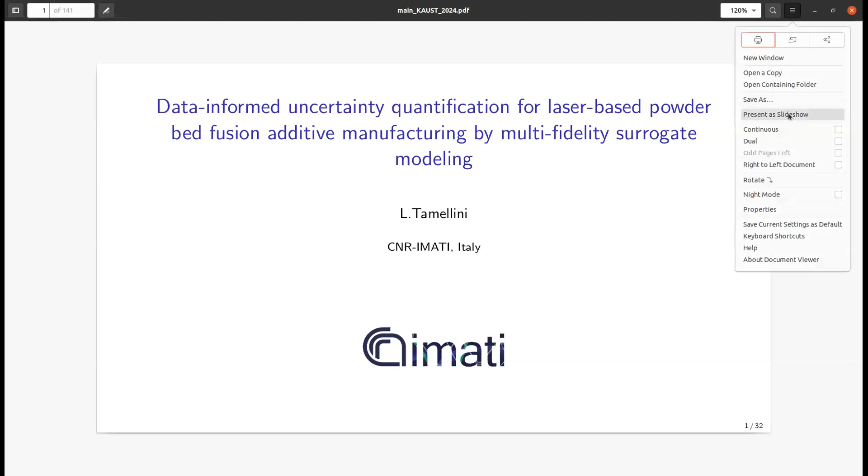Thanks, Joachim, for setting up the stage. Thanks, everyone, for listening. It's too bad I cannot be there, hopefully next year. But in the meantime, can you hear me well and can you see my screen? Yes. Okay. How much time do I have? 45 minutes or so? You have 1 hour, but that includes questions. Yes, including questions. So, okay, great.

So the title of my talk is, as you see on the screen, data-informed UQ for laser-based powder bed fusion additive manufacturing by multi-fidelity surrogate modeling. There's a lot to unpack here, so I will see how well I can do.

The outline of the talk: first I will give you a brief introduction to the so-called multi-index stochastic collocation. I think most of you are very familiar with this, but just in case someone in the audience is not experienced with it, it's a special multi-fidelity method for parametric PDEs. It extends the sparse grid collocation method, and what you get at the end of the day is a surrogate modeling approach. So you get a response surface of the quantity of interest of your problem that you can use for quantification purposes. Then I will spend most of my time talking about the additive manufacturing problem that we try to tackle with the multi-index stochastic collocation method.

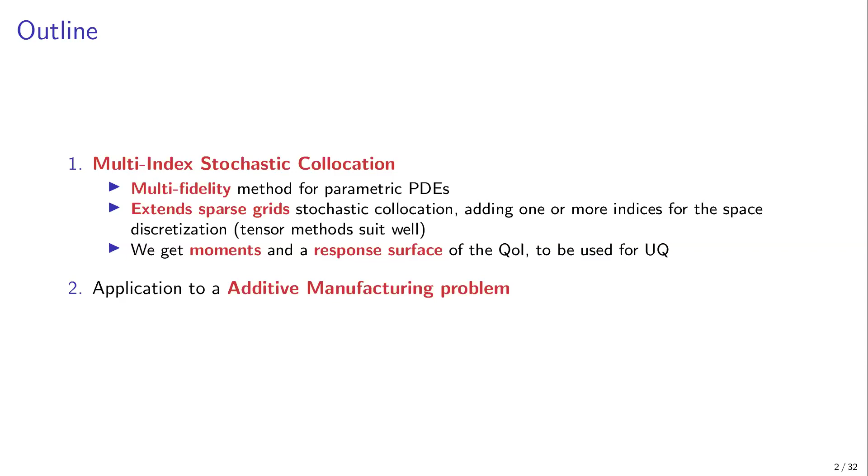So I have to acknowledge a bunch of people. As for the multi-index stochastic collocation, several people have worked on that during the years: Raul, Fabio, Abdul Latif, and Joachim, all in the room as far as I know, and Chiara Piazzola also - she was a postdoc with me in Pavia, and now she is at Munich TUM. And regarding the application today at the additive manufacturing problem, the group of civil engineering at University of Pavia: Ferdinando Auricchio, Massimo Carraturo, Michaela Chiappetta, and Alessandro Reali, and again Chiara Piazzola.

So the first part is where I talk to you about multi-index stochastic collocation. If you are already familiar with this, just feel free to check your email for 5 minutes - I'll tell you when I'm done. For those of you who don't know, this is a brief introduction to the method. Throughout the talk, I'm interested in computing a quantity of interest F out of a PDE.

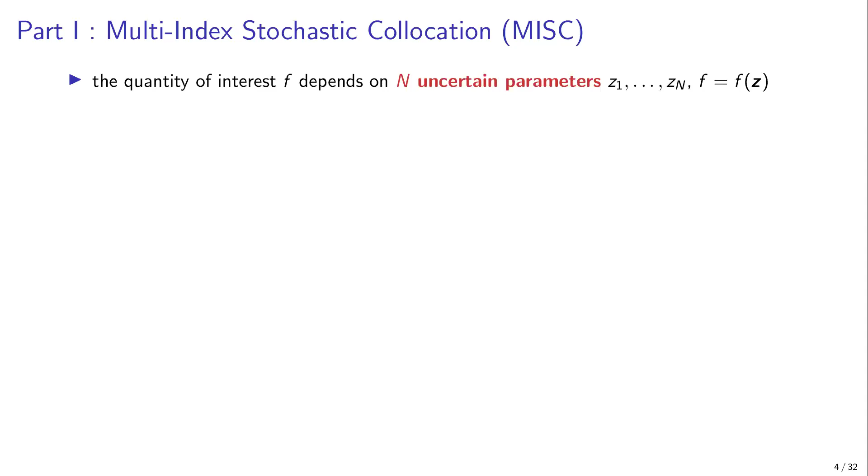This quantity of interest F depends on n uncertain parameters. The PDE that we are working with depends on these n uncertain parameters, which I call Z1 to Zn, and F is the output of the PDE solver. For instance, just to fix ideas, in the final application, the quantity of interest will be the warpage of the component that I'm printing, as well as the strains - quantities of interest deduced from the solution of the PDE.

The PDE solver, we assume, depends on R hyperparameters. By hyperparameters, I mean mesh sizes, time steps, tolerances for solvers - these sort of things. So parameters are physical quantities, hyperparameters are my knobs to decide what solver I'm actually using. And then I collect them in a vector alpha that has R components.

It's a multi-index that I use to control the PDE hyperparameters. So for instance, the mesh size could be 2 to the power minus alpha, or the time step could be 2 to the minus alpha, or maybe I want to play with both the mesh size and time step, and then I have two components, and H will be 2 to the power minus alpha 1, and delta T will be 2 to the power minus alpha 2.

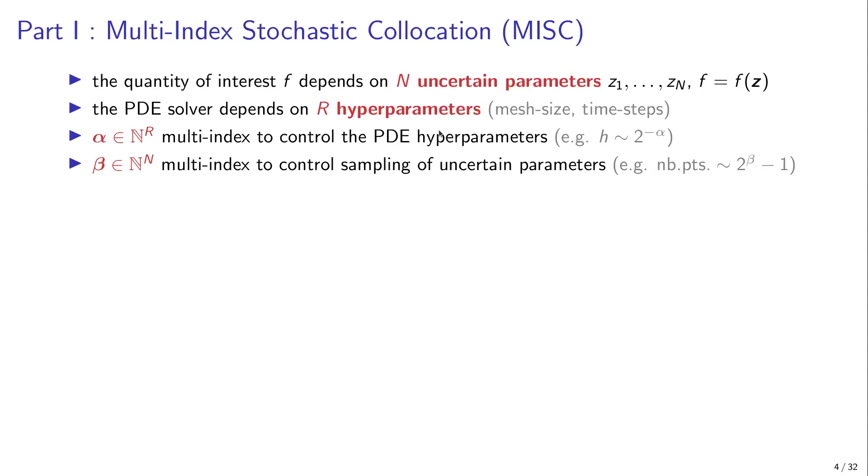Same thing for beta. Beta is a multi-index, it has n components, and each component of beta controls how much I sample the parameter space along each parameter. So for instance, I could decide that I put 2 to the power beta-i minus 1 points along each direction of the parametric space. And then f sub alpha beta is the approximation of the quantity of interest that I'm interested in, given a PDE solver with hyperparameters controlled by alpha, and sampling scheme controlled by beta.

So for instance, here, if I want to solve a linear elasticity problem over this banana shape, and imagine that the elastic equation depends on two uncertain parameters, this is a picturesque representation of the fact that I want to use a multi-index 2, 4, 2 to decide the three discretizations of the mesh. So you see here the mesh is 4 by 16 by 4, so multi-index 2, 4, 2, and I'm using 3 times 9 points in the collocation space - multi-index 2 gives 3 points, and multi-index 4 gives me 9 points.

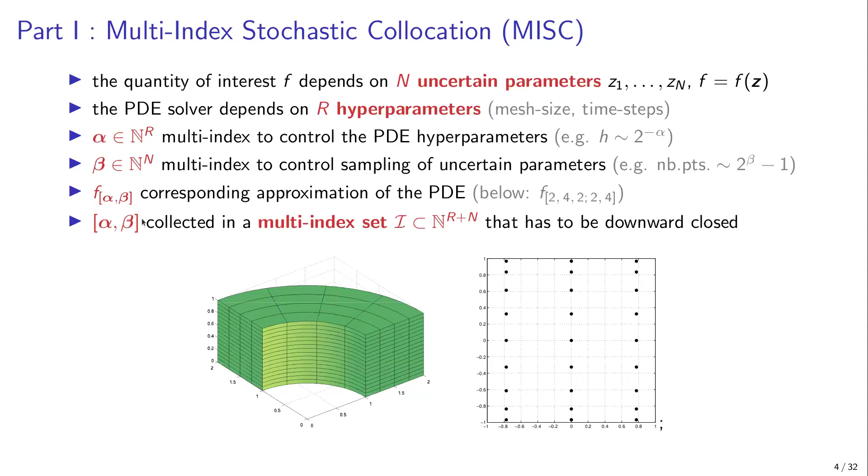I want to juggle not just one discretization f sub alpha beta. I want to juggle multiple approximations. So I need to collect all the approximations indexed by alpha beta in a multi-index set. And as I promised, I want to juggle many approximations.

What I mean more specifically is the MISC formula gives you this approximation. So the approximation of your quantity of interest, f of z, is the MISC approximation, a linear combination of multiple approximations, f sub alpha beta, each multiplied by a certain coefficient c, which depends on alpha beta. So this is what I mean by juggling multiple combinations, multiple approximations.

This has advantages if you do things properly, let's say. So here's just a pictorial representation of MISC.

Imagine that you have just one hyperparameter, so r equal 1. Imagine that you have one uncertain parameter, so n equal 1. And imagine that you have two levels of mesh. So on the horizontal axis, I have alpha equal 1, alpha equal 2. On the vertical axis, imagine that I can either compute one point in parameter space, or two points in parameter space, so 1 and 2.

I have these 4 possible f sub alpha beta, C, Q, F, and P, and I'm looking for a certain linear combination of P, C, Q, and F. In particular, F is the highest fidelity, where I compute a lot of samples, over a fine mesh. This is out of reach, so the MISC approximation takes into account the other 3 possible approximations, P, C, and Q.

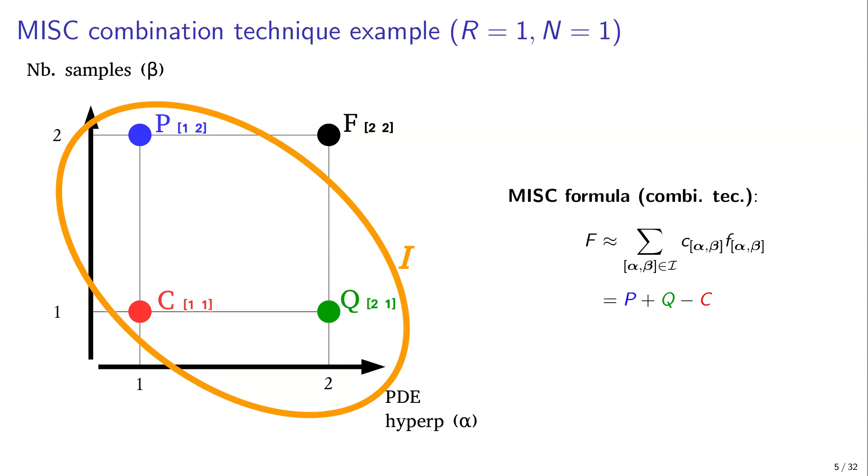So I want to choose the best set of approximations to combine, and there's an algorithm to do that. It's a very standard algorithm, inspired by the usual Gerstner-Griebel a posteriori algorithm for sparse grids. It essentially goes around in this space of all possible approximations, computes a profit for each of them, and iteratively selects the most profitable one, and then goes on and on.

So it's very easy in a way. The devil's in the details, but overall the idea is quite simple. In practice, what this method does is reconstruct a full approximation as a linear combination of many coarser solutions. So you see here, I'm reconstructing the true solution as a linear combination of P, Q, and C.

It extends the sparse grids approach to a multi-fidelity approach. Sparse grid stochastic collocation would be single fidelity. Instead, here we're playing with multiple fidelities with the hyperparameter alpha. So it's a multi-fidelity method.

And if you do things carefully, it balances the solver error, the PDE solver, and the parametric error. We do have convergence rates, and these convergence rates resemble those of sparse grids. So if you know those results, you know what I'm talking about. If you don't know those results, it's enough for you today to know that there are convergence rates.

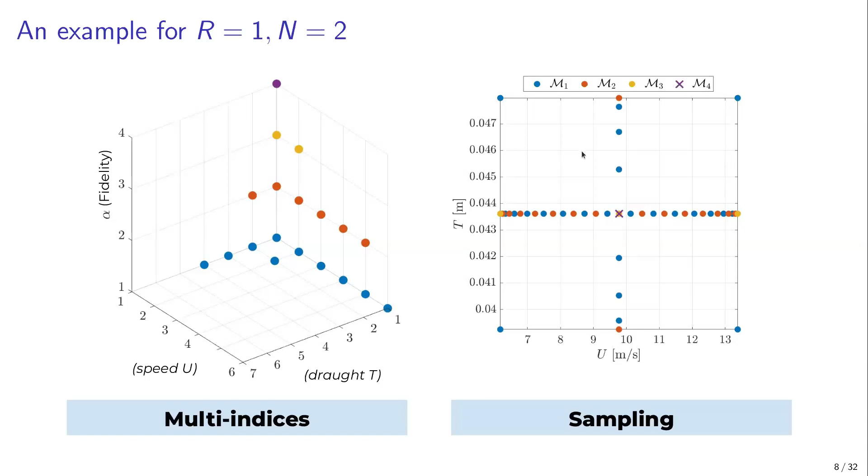Then I think I will just skip this. This is a standard test case. I don't want to talk about this.

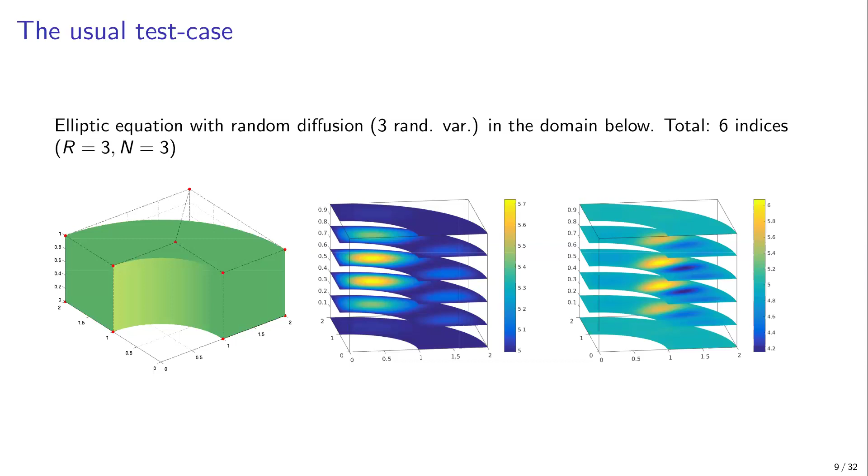And this is essentially when the response of the PDE, so the quantity of interest, depends smoothly on the uncertain parameters. And why is that? Because the idea is that you explore most of the variability of the output with a lot of queries to a coarse solver, and then you correct with only a handful of calls to the higher fidelities.

So here, this cartoon is just to show you that in the previous convergence line I was showing, eventually for the finest fidelity, for the finest tolerance I'm requesting, I'm evaluating only 100 times the largest mesh, versus a few thousand evaluations of the coarse mesh. So this is why we gain in complexity, let's say.

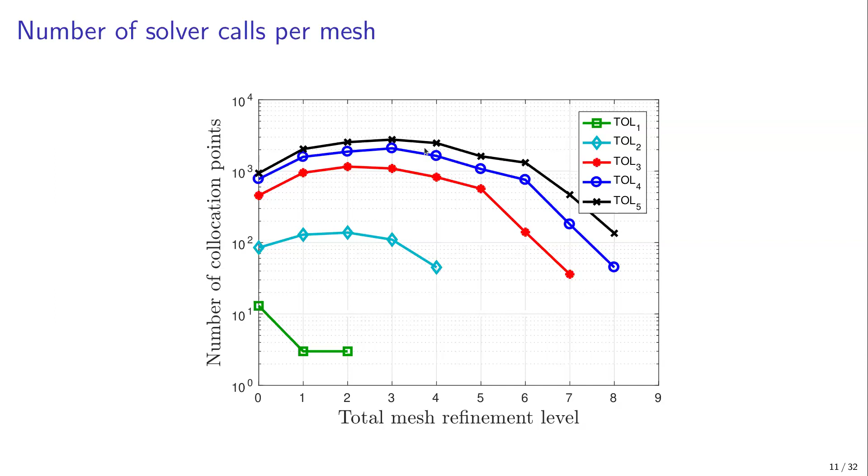So now it's time for those who disconnected because they know MISC to get back to me, because now I'm going to talk about the application, the additive manufacturing problem. So let's try and make this informative also on the application. I want to give you some flavor of the actual problem.

This is a 3D printing in practice problem. Specifically, I'm talking about 3D printing of metals. 3D printing of metals is usually done by this technology called laser-based powder bed fusion. In 3D printers, there's a layer of powder, a laser goes around and melts the metal. Everything cools down. Another layer of powder is laid, another time the laser goes around and melts the powder, and in this way, an object is built layer by layer.

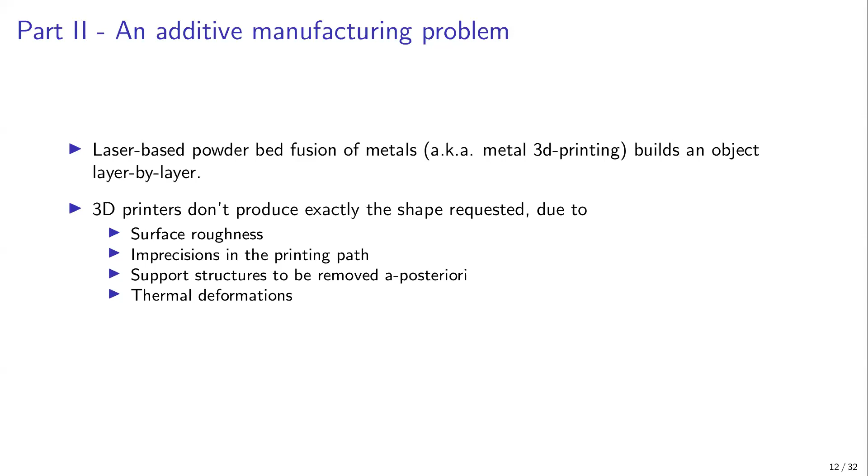Of course, there will be need for support structures, small pedestals or columns that you want there just while building, while printing, and then you want to remove them. But when you snap away these support structures, you might be left with an imperfection in the surface. There are thermal deformations because the metal is constantly heated up and cooled down every time the laser goes by. There are a lot of thermal deformations, and there are residual stresses.

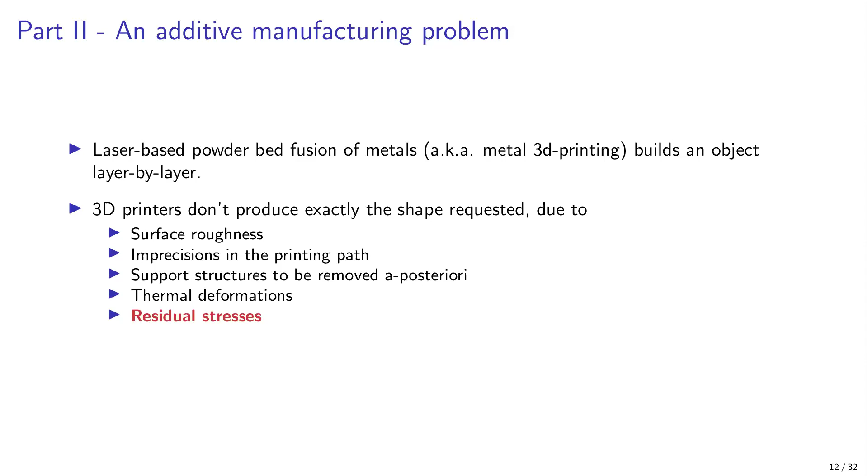And we focus - the problem we are facing in this talk - is what to do with residual stresses. Let me be clear, what do I mean by residual stresses? It means that, let's say you want to print this object here, this beam or this comb if you want. Can you see my mouse, by the way? If I move the mouse? Maybe not.

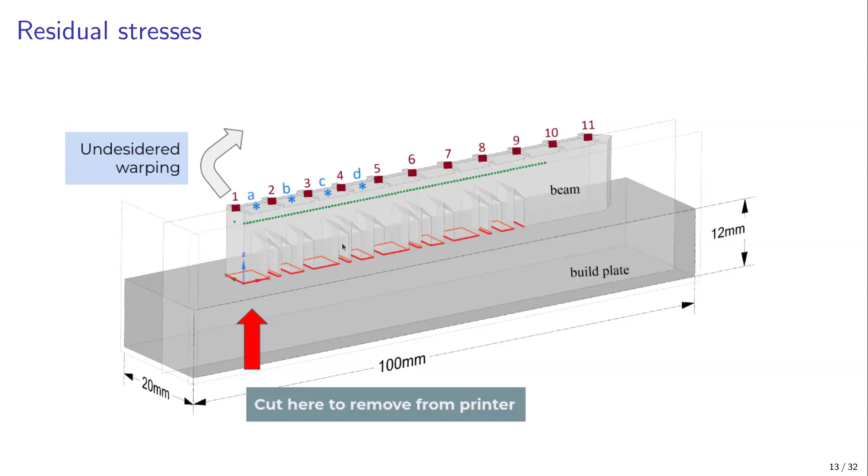But anyway, yes, okay. So if you want to print the comb, what you do in practice is there's a build plate, a larger chunk of metal, and then you print the beam on top of this. Then you want to remove the comb, because that's your final object, the thing that you care about - you don't care about the build plate. The moment you cut the red areas to remove the comb from the build plate, there will be an undesired warping. It means this: you cut it open, internal residual stresses are released, and the deformation is applied. It's pretty much like when you crack open a watermelon.

Once you crack open the watermelon, you will never be able to put it back together, because the moment you crack it open, internal stresses are released, and these deformations happen. And of course, we don't want the deformed part, we want the original one.

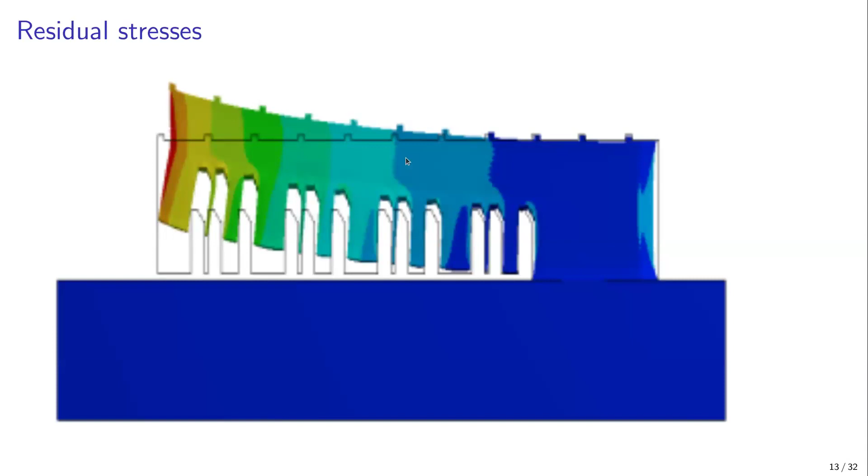So we want to monitor the residual stresses and optimize the printing process such that the residual stresses are as little as possible. There is thermal treatment, so if you bake the objects before cutting them open, it improves the release of these stresses.

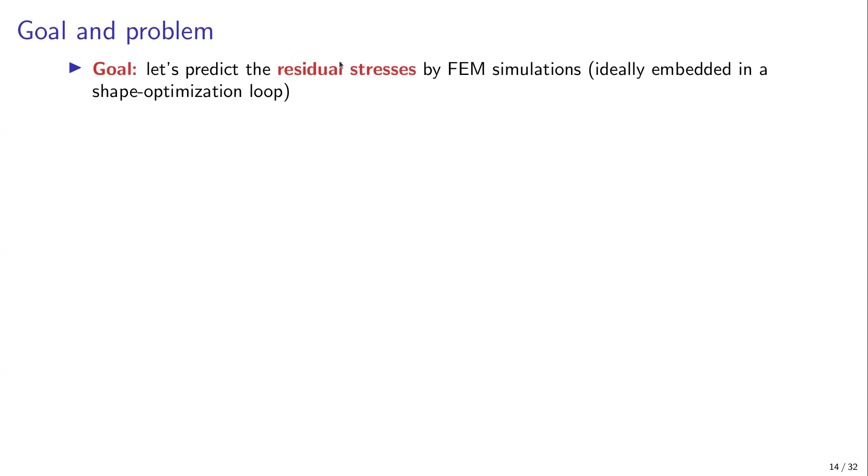But still, ideally, you want to have a FEM solver, a FEM simulator that simulates the printing process and predicts the residual stresses, so you can optimize the process to reduce them. Problem is, these simulations are crazy expensive. It's a matter of days on supercomputers.

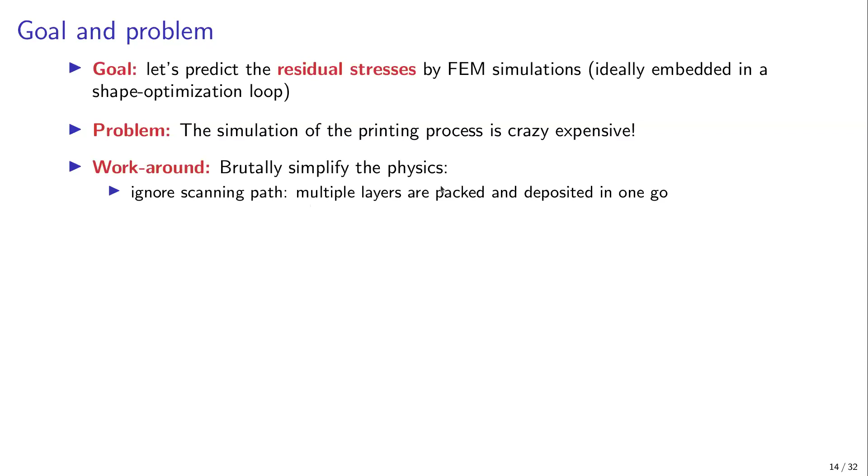So what we do is brutally simplify the physics. We go ballistic. To begin with, we ignore the scanning path. So instead of having a laser that goes around, to simulate the printing of a whole component, you have to assume that multiple layers are packed and deposited in one go, without simulating the scanning path.

Then, instead of solving a time-dependent, fully plasto-thermal PDE, what you do is solve a time-dependent, non-linear thermal equation only on the sequence of geometries you have. Then you store the thermal field history, and solve a quasi-static mechanical problem to evaluate the thermal strains. So a sequence of mechanical problems, but you forget about the temporal evolution.

And now the problem is we're replacing a couple of viscoelastoplastic thermal PDEs with a thermal PDE and a mechanical PDE. So the physics is totally made up.

So what kind of parameters do we use in this thermal plus linear mechanical model? We don't know. Those phenomena don't exist in reality. So we need to cook up the parameters of the non-linear thermal equation and of the quasi-static mechanical problem to have this super simplified and non-realistic physics match the real process.

And what we do is an inverse Bayesian analysis to find the parameters of this cooked-up physics that match the experimental results. We do this using surrogates, either sparse-grids or MISC.

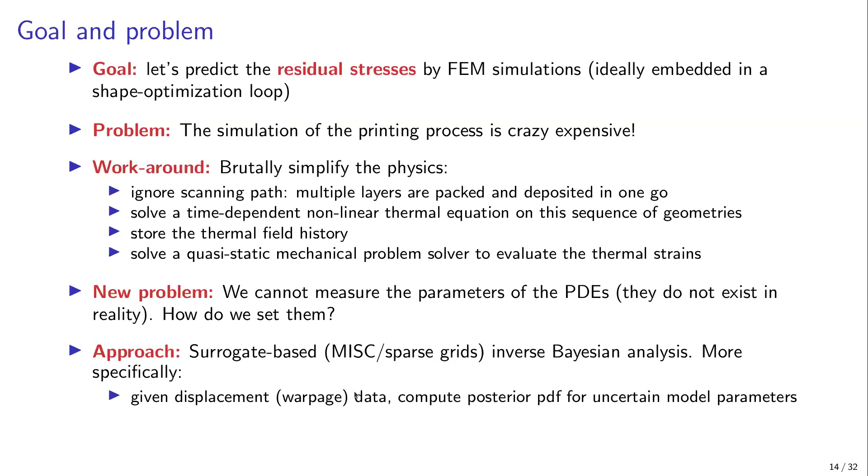In particular, we have displacement data, we have warpage data. So someone prints the comb, measures the displacements, and with this data we compute the posterior PDF of the uncertain parameters, then propagate the posterior PDF through the model to compute the PDF of the residual stresses. Once we have the residual stresses, we are done.

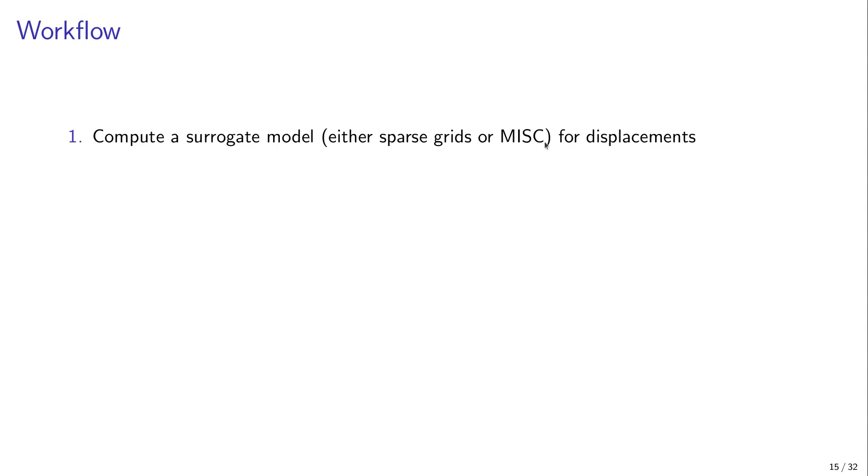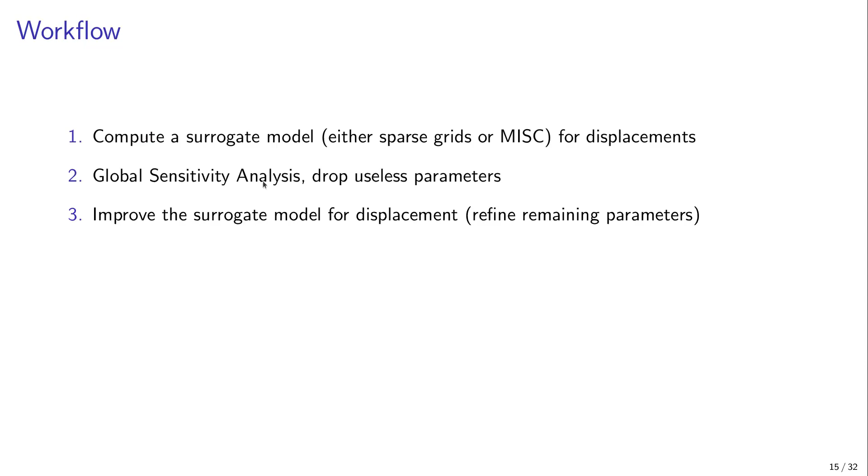So what we do in this talk is compute a surrogate model, either single fidelity or multi-fidelity, for the displacements of the comb being printed. We do a preliminary round of global sensitivity analysis to drop the useless parameters, then refine our surrogate model based on this analysis. We do inverse Bayesian analysis to compute the posterior PDF of the uncertain parameters.

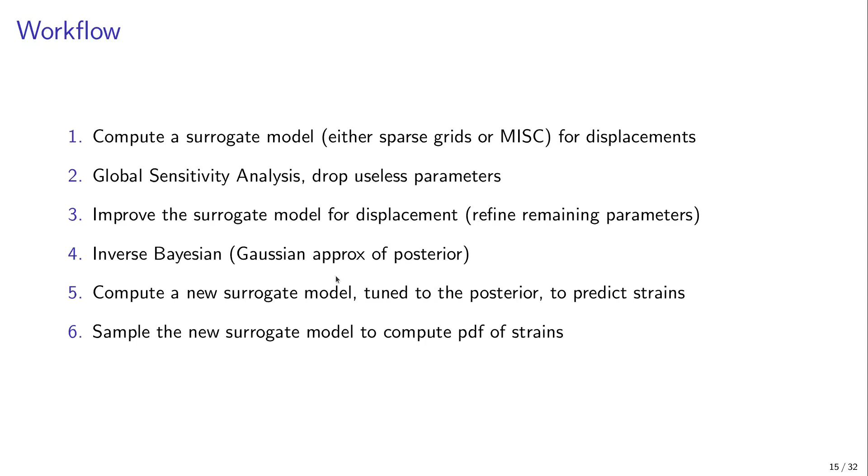And then we compute a new surrogate model, this time for the strains, not for the displacements, tuned to the posterior to predict the strains. And then we query the surrogate model to compute the PDF of the strains.

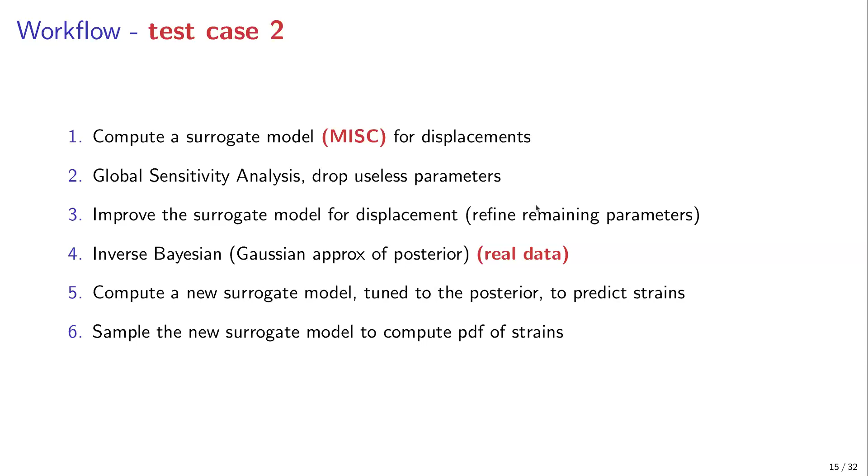I will walk you through two test cases. The first test case is with synthetic data and uses a single fidelity approach. This is already enough to walk you through most of the technical difficulties. Once I'm done with that, hopefully I will make it also to the second test case, where we use a multi-fidelity surrogate model with real data provided by NIST, the National Institute of Standards and Technology from the US.

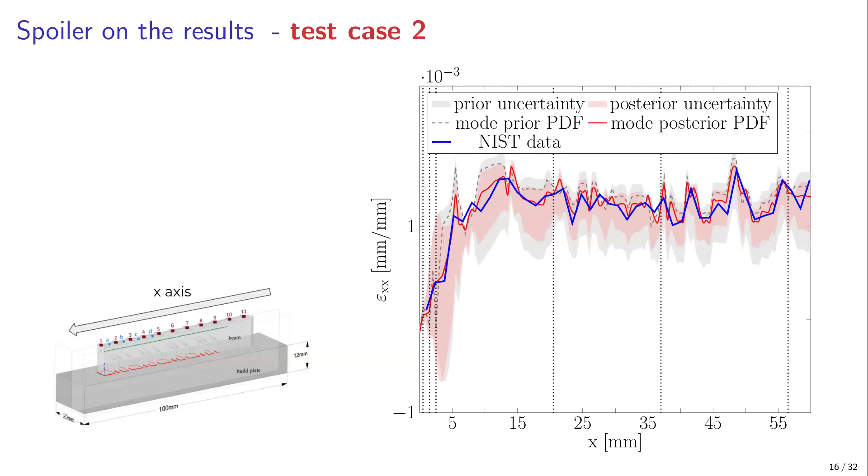So in short, we are using either a single fidelity or a multi-fidelity surrogate for a complicated problem. We are able to predict everything. It works.

But there are some technical difficulties. The first difficulty that was mentioned is computational time. One simulation takes 4 hours on the lowest fidelity mesh and 6 days on the high fidelity mesh. And it's not 6 days on my laptop, it's 6 days on servers provided to us by ANSYS. We are using ANSYS to simulate the 3D printing process. One simulation takes 6 days on those servers. So it's really something, let's say.

Then we didn't go fully Bayesian, so we didn't go Markov chain Monte Carlo. We were happy enough with a Gaussian approximation of the posterior. There's something that needs to be taken care of there. I'll show you later on.

And then the final technical difficulty that maybe some of you caught already is that I'm using 2 surrogate models. One is tuned to the prior, one is tuned to the posterior. Can we do something better than that? I have ideas, but I'm not going to show you any results on this.

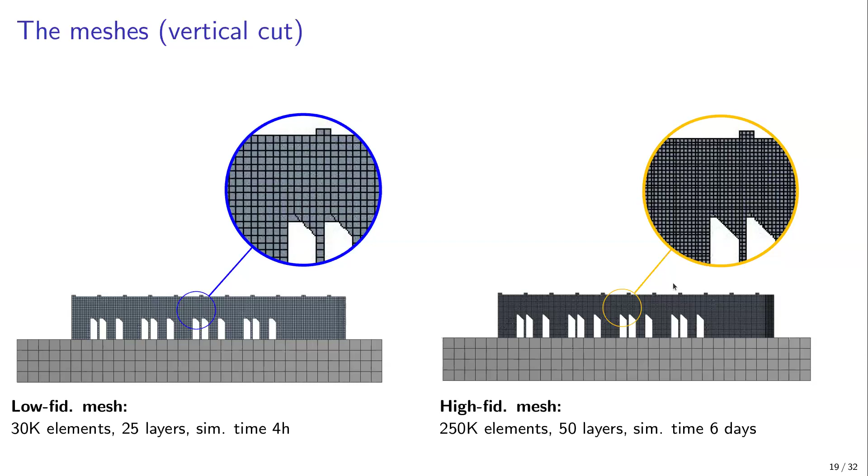As I said, each layer is deposited in one go. We don't simulate the scanning path. It's laid at the activation temperature T. Then you wait for it to be cooled, and then you add a new layer. What we don't know is the activation temperature, really, because that's a non-existing quantity in a way.

And then we don't simulate the presence of the powder in the printing room. So what we simulate is just the heat dispersion, the heat exchange with either the powder or the gas that surrounds the part. The part is either drowning in powder or exchanging heat with the air. Where it's not air, it's an inert gas like argon, or I don't remember. And we don't know these two exchange parameters. They are non-existing, so we don't know. We have to tune them.

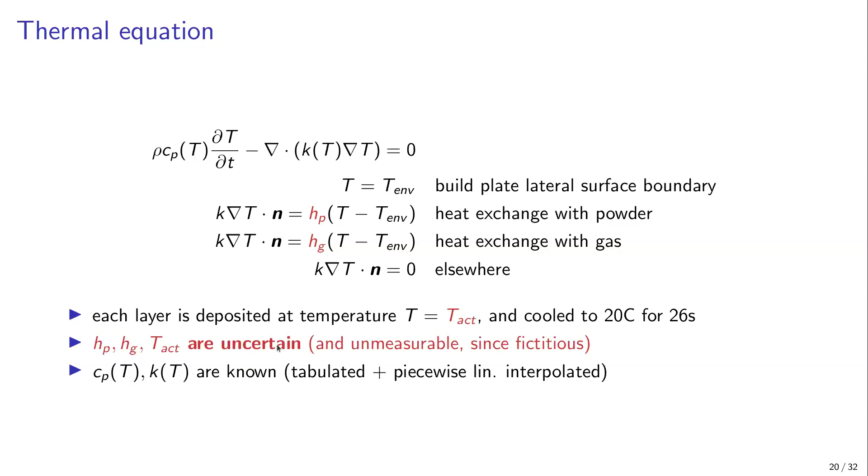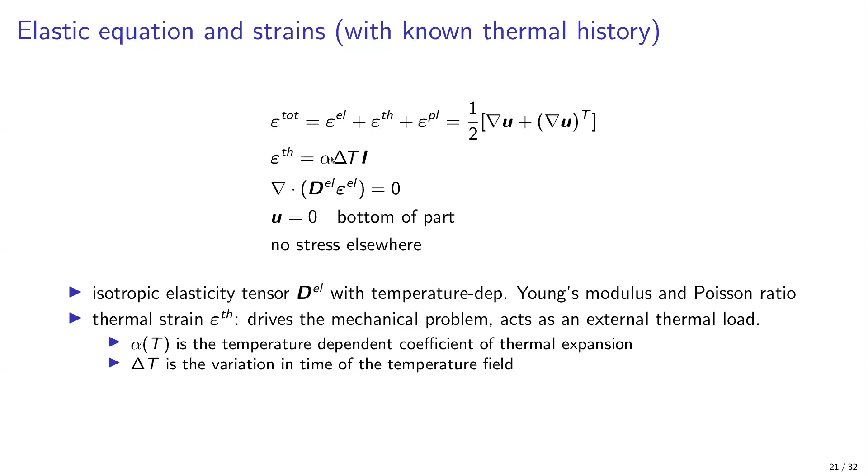The other two parameters, CP and K, we know them. They are tabulated and linearly interpolated. The elastic equation for computation of the strains is this. There's an elastic part—the Young modulus and the Poisson ratio are temperature dependent. There's a thermal part—the alpha here is also temperature dependent. And then there's a plastic strain rate computed with the Prandtl-Reuss flow rule, which is also temperature dependent. So the elastic equation is temperature dependent. And this is all I want to say about the elastic equation.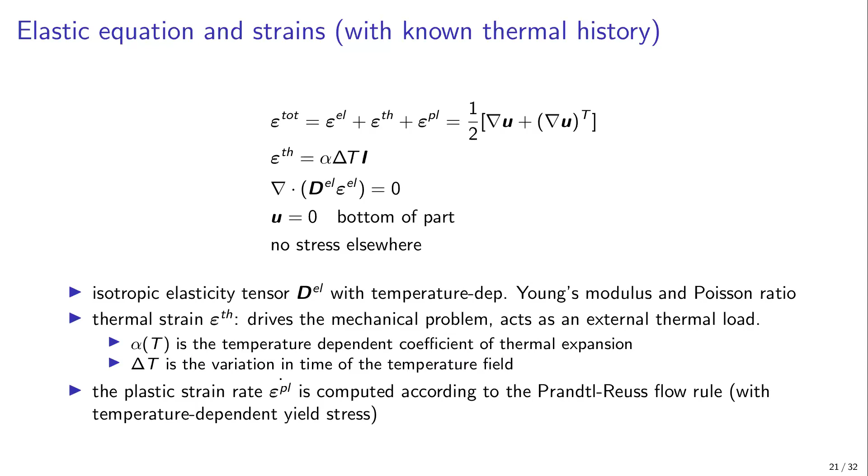Now, let me go a bit more into the UQ side. As I said, we assume that we don't know three things: the activation temperature and the two heat exchange coefficients. For the activation temperature, people in literature use numbers in this range, more or less.

The gas convection coefficient is also widely unknown. We thought it would be nicer or more convenient to assume uncertainty on the logarithm base 10 of the convection coefficient. So this thing can go between 10 to the minus 5 and 1, essentially. So the logarithm goes between minus 5 and 0. These three uncertain parameters, we take them as uniform. We don't know anything, essentially, more or less.

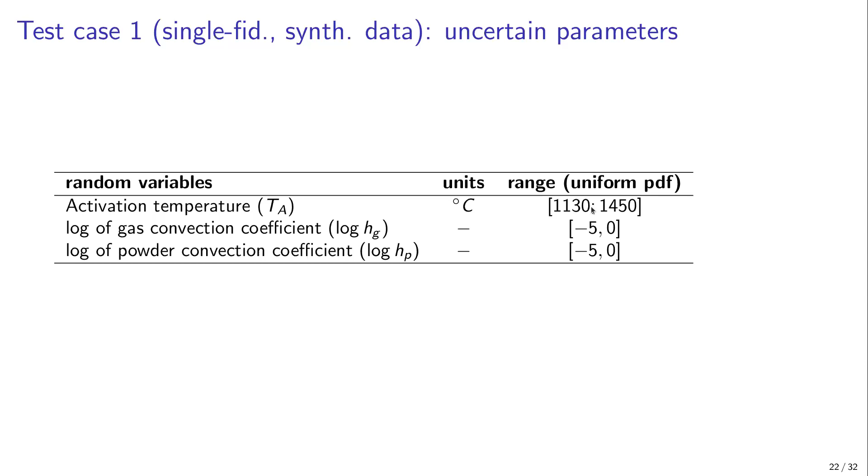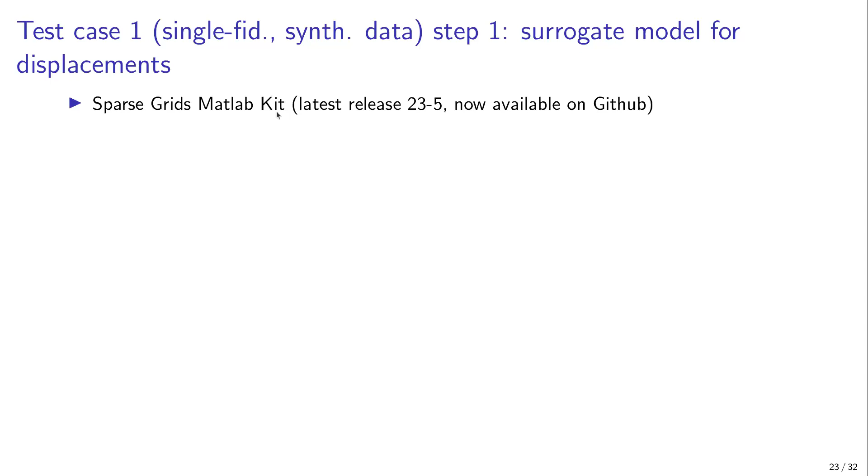First thing first, I promised you a surrogate model for displacements to do the global sensitivity analysis. The tool that we use is the Sparse Grids MATLAB kit. We build a very coarse isotropic sparse grid with 27 points. This is already something, given that one simulation takes 4 days.

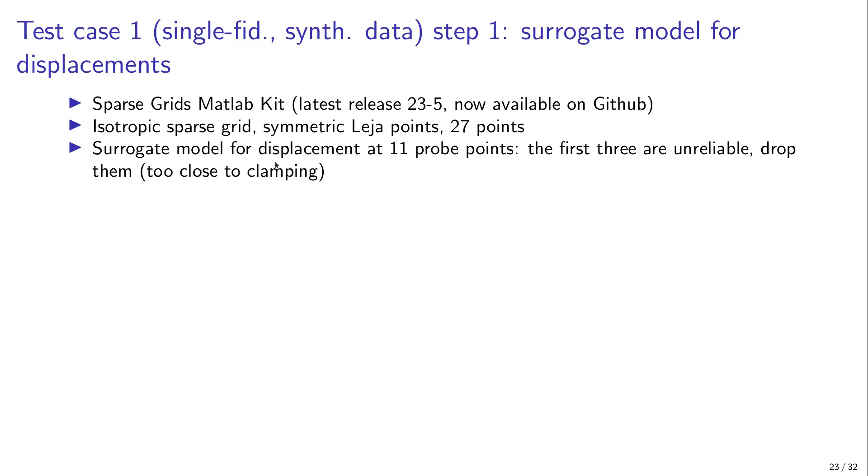And then we do a surrogate model for the displacement at these 11 probe points, 1 through 11. We actually immediately realized that these 3, 11, 10, and 9 were too close to the clamping part, so nothing interesting happens here. We just drop them.

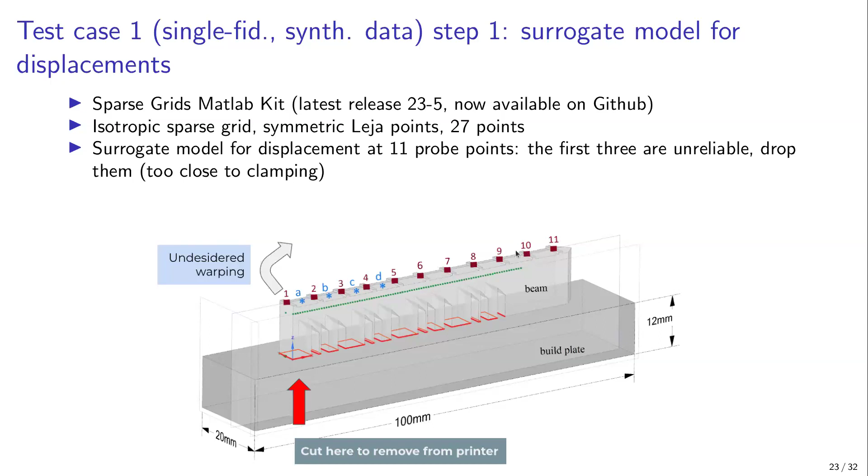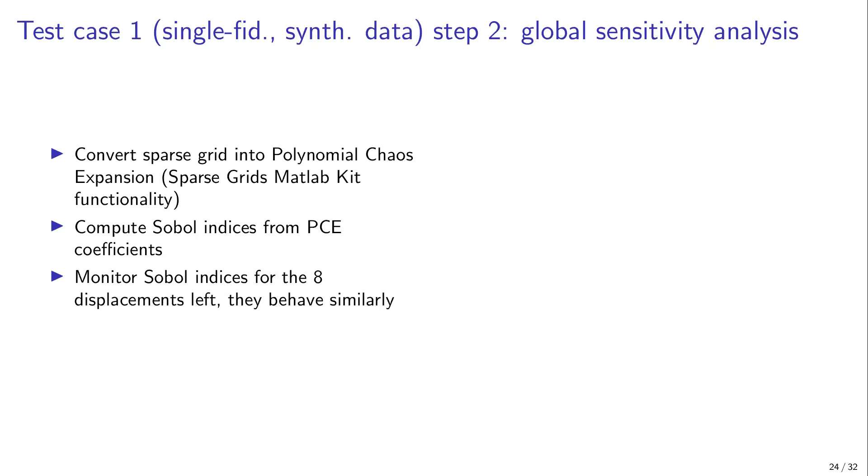Once we have the surrogate model, we convert it into polynomial chaos and compute the Sobol indices for global sensitivity analysis purposes. These are the principal Sobol indices. Forget about these three, they are irrelevant, they are unreliable. The other 8 probing points, TA and the logarithm of the powder, are the only things that matter. So we fixed the third parameter, and from now on we will just consider two uncertain parameters.

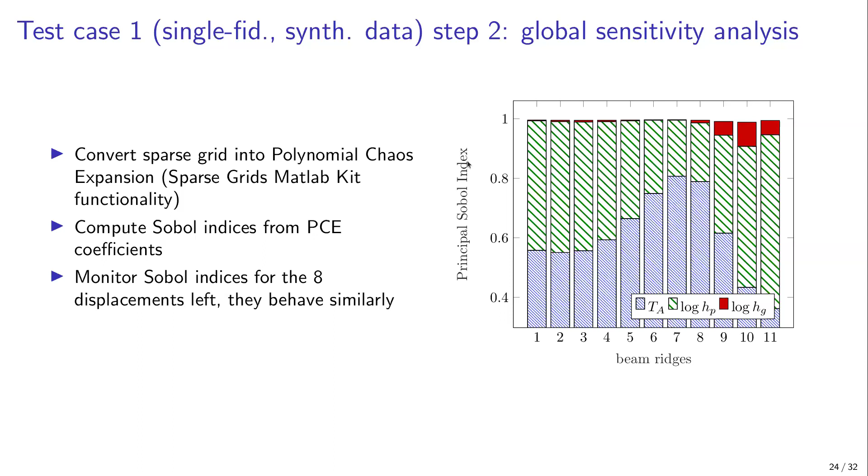At this point we fixed the third parameter to a convenience value, and we refine the surrogate model a bit. This time we have only two parameters, so we can push it a bit further with 25 simulations using symmetric Leja points. Again, we do a surrogate model for the displacements of 9 probing points, labeled 1 to 5 in the plot, and A, B, C, D, because this is where we have the data by NIST. So we don't care about 6, 7, 8, and 9. We can forget about them. We only care about 1 to 5 and A to D.

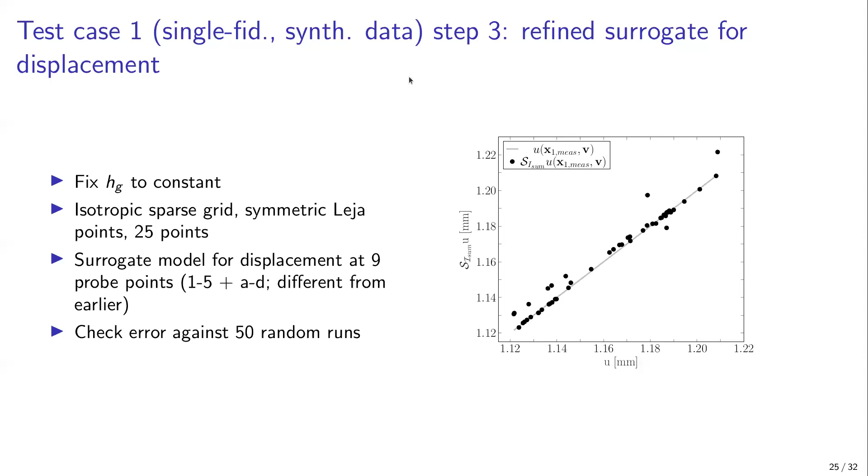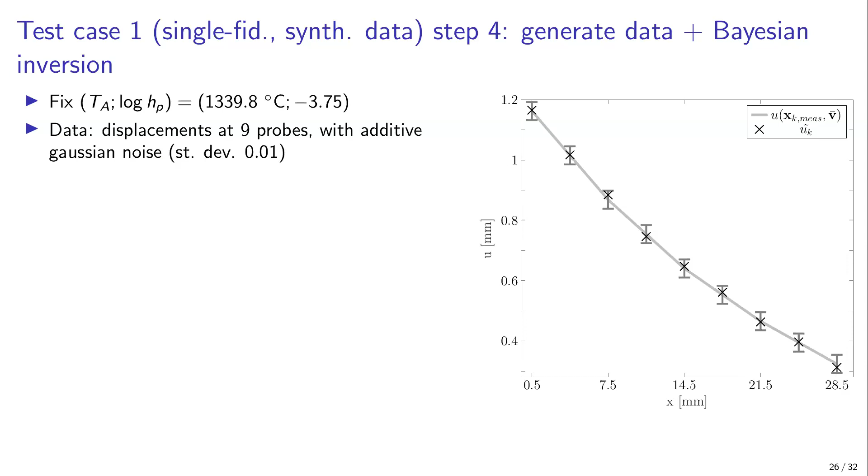Now here it's something perhaps non-standard. What we do, of course, is write down the negative log likelihood. Everything is fairly standard. Then I want to minimize the negative log likelihood to get the maximum a posteriori, and I do this by Nelder-Mead, a derivative-free optimizer. I run it 20 times, starting from different initial conditions.

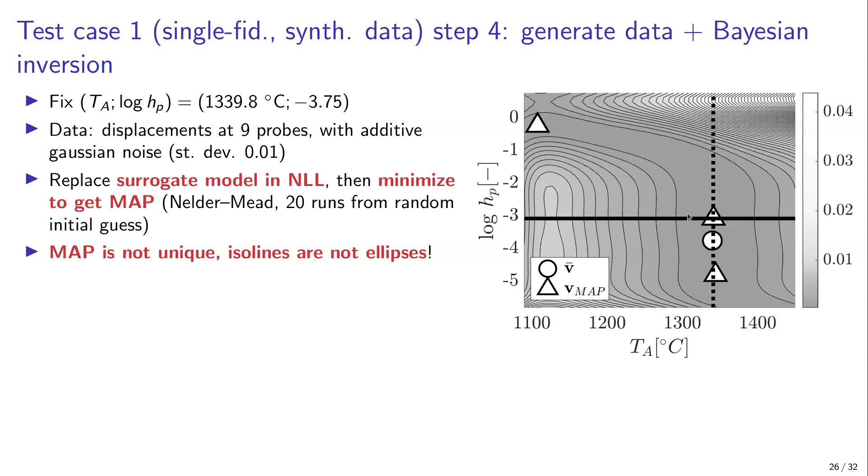So what we claim, whether this is appropriate or not is up to discussion, I'm happy to talk about this. We made our life easier and claimed that the posterior of TA is Gaussian, and the posterior of log HP is uniform, but on a smaller interval. The Gaussianity is standard. The posterior of log HP is uniform on a smaller interval that we're taking, essentially eyeballing the interval by looking at the one-dimensional cut of the NLL - so more or less between -5 and -1.5, close enough. Is this ideal or mathematically rigorous? No, probably not, but it worked, and it doesn't seem completely crazy.

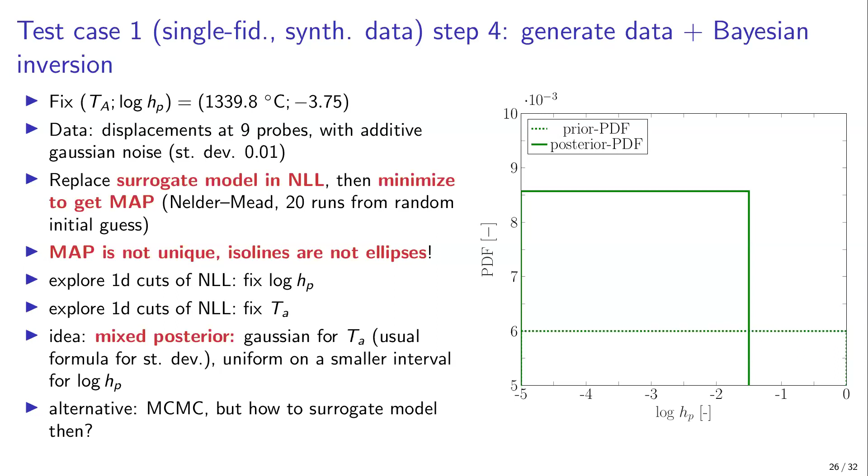Now the point is that I have a posterior with well-defined PDFs. So I can generate another surrogate model, this time for the strains, not for the displacements, and this time with one parameter being uniform and the other one being Gaussian.

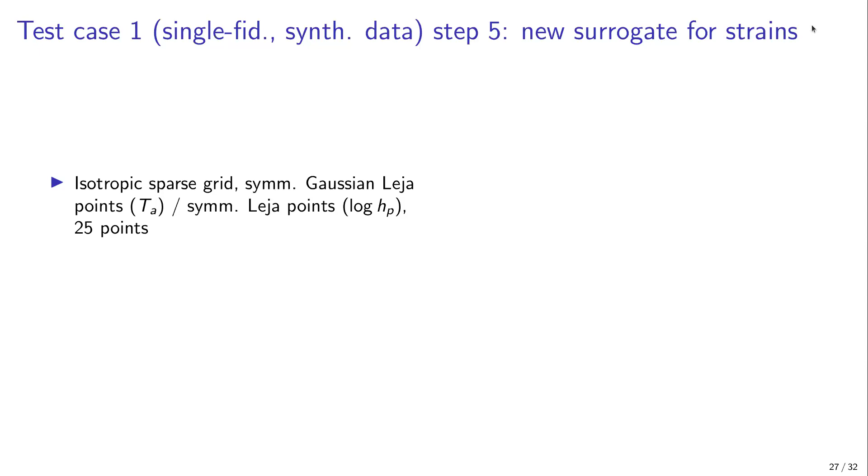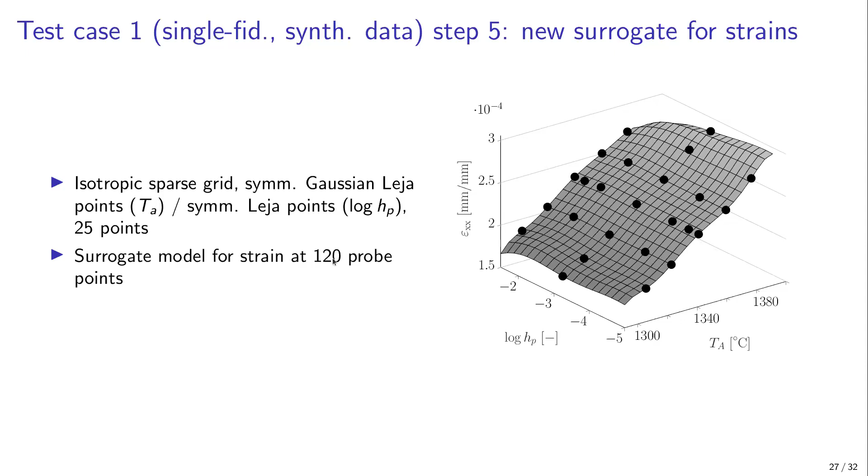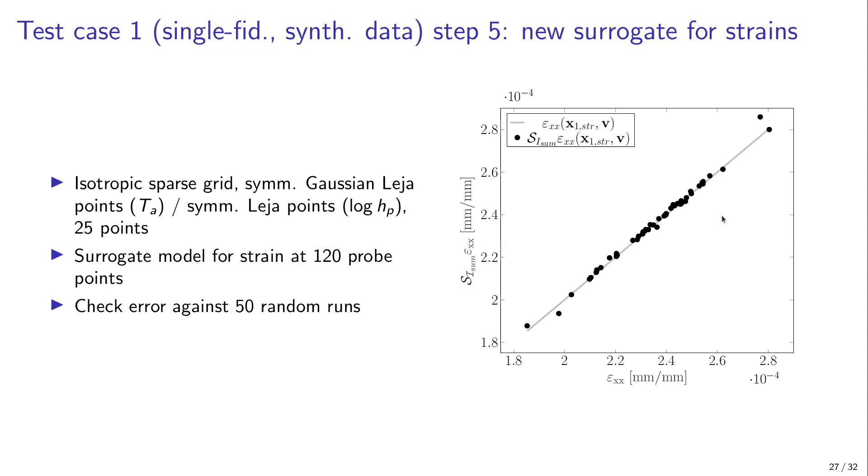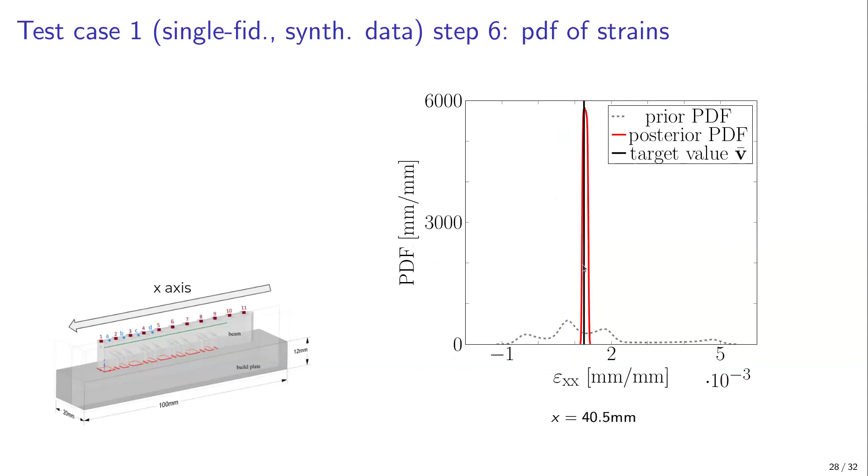Now this is the support of the prior and posterior based quantity of interest. I'm going to show you next the PDFs, prior based and posterior based, and the target value. So you see here, this is x 40.5, so fairly to the right. And then as I'm changing slide, x is increasing, so I'm moving toward the left, toward the point of maximum warpage. And you see that the concentration is significant, and the PDFs are centered where they should be, around the posterior essentially. So we were happy, essentially.

Now this is it for test case number 1. Now I'm going to move to test number 2. Here we replace synthetic data with real data and single fidelity with multi-fidelity.

What was the issue with the single fidelity? The single fidelity was just incompatible with the real data. The maximum range of displacement predicted by the single fidelity mesh was just not enough to cover the real data. So if you want to do inversion on real data, either you use single fidelity on the high mesh, or you do multi-fidelity. And remember, one run on the high fidelity takes a week on the ANSYS solvers. So multi-fidelity really is the, as they say, the key enabling technology, right?

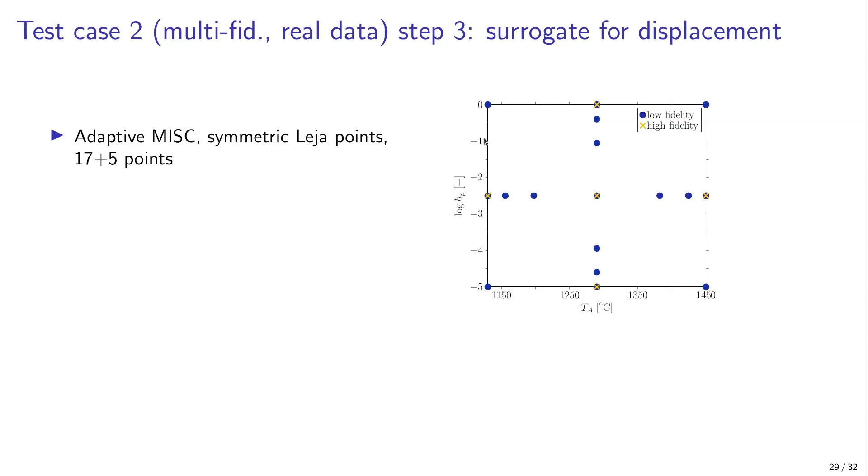So now we do an adaptive MISC, bi-fidelity in practice, because we're using 17 runs on the coarse mesh and only 5 runs on the high fidelity. This is how the surrogate model for one of the 9 displacements looks like.

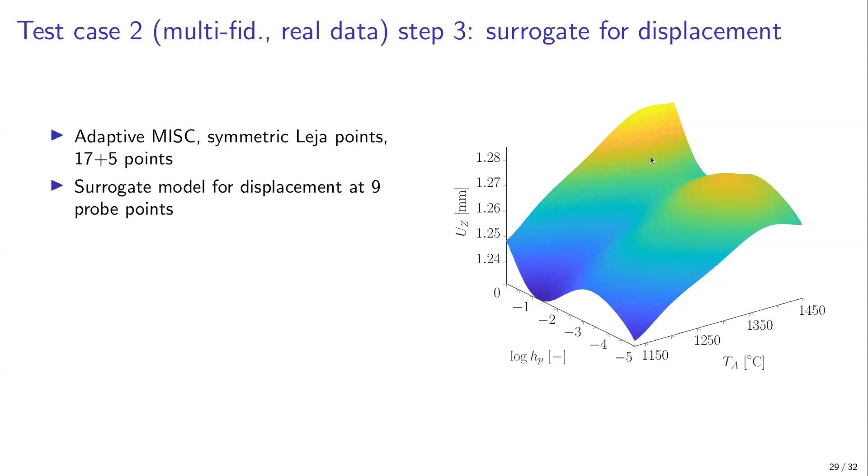I was skeptical about the fact that this is not monotone increasing. The single fidelity surrogate was monotone increasing. This is not. The engineers were happy, so what can I say? We went along.

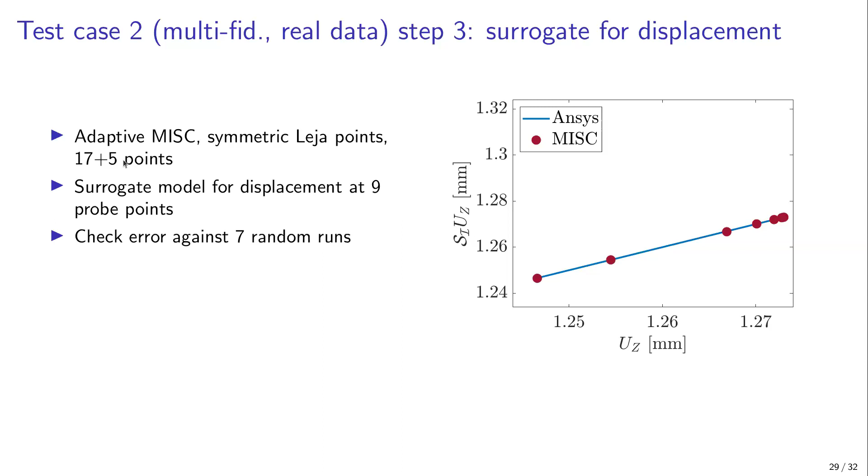We had the luxury of having 7 random runs on the high mesh from previous experiments. We were clever enough to store them. So now we have 7 random points to check our surrogate model against. And you see that as the surrogate model goes on, we get a fairly good match, even with this very small number of simulations. So we were happy enough.

Now I'm going to the inversion. This time the data that we have, you see here the probes, these are measured by NIST. NIST provides us measurements of the displacements, and they were also able to measure strains. But strains are super complicated and super expensive to measure, so it's not something that happens every day.

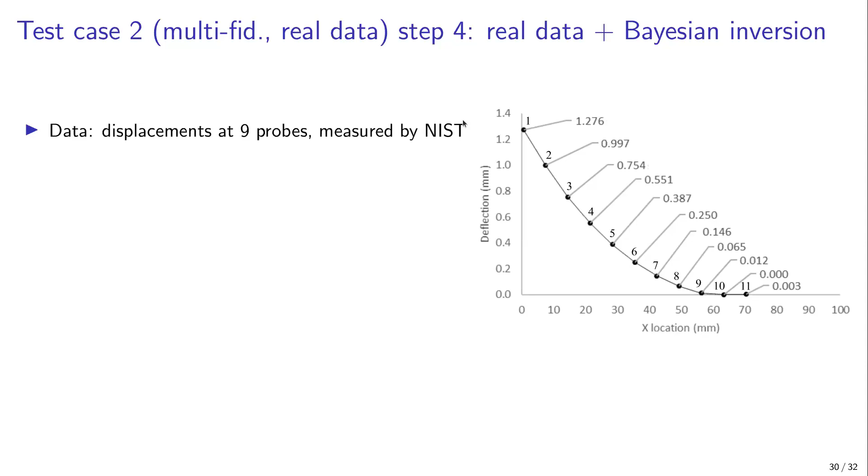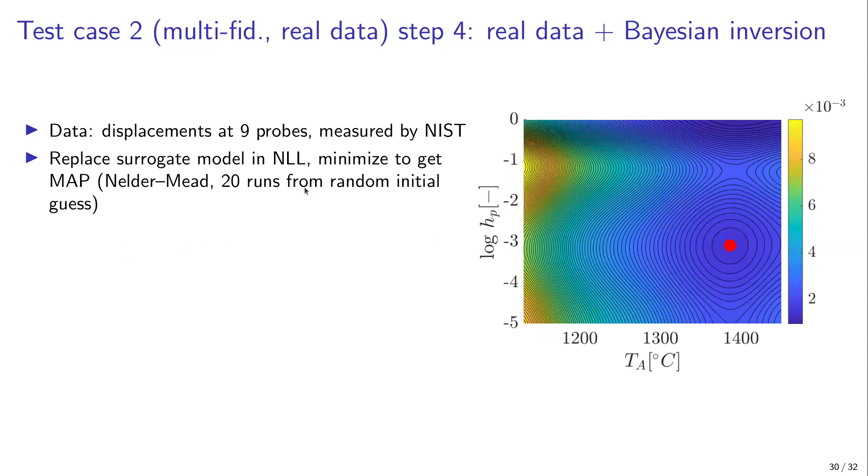Again, we replace the surrogate model in the negative log-likelihood, and we minimize by Nelder-Mead to get a MAP estimate. And you see that more or less this time the isolines are ellipses for some reason. So this time there's no reason to go weird on the assumptions on the posterior. We claim that the Gaussianity assumption is okay, at least locally. I mean, there's something going on here on the boundary, but I don't want to deal with this. So we're happy enough, from an engineering point of view, with the Gaussianity assumption.

The problem is, though, that the support of the posterior overflows the support of the prior. So we are going to need to run again some other runs, a handful, because if you want now to do a new surrogate, you need to query your model somewhere else. And notice that I cannot use the prior surrogate, I have to use the posterior surrogate, because half of the posterior is outside the interval where the prior surrogate model was defined. So really, I need to run something more here.

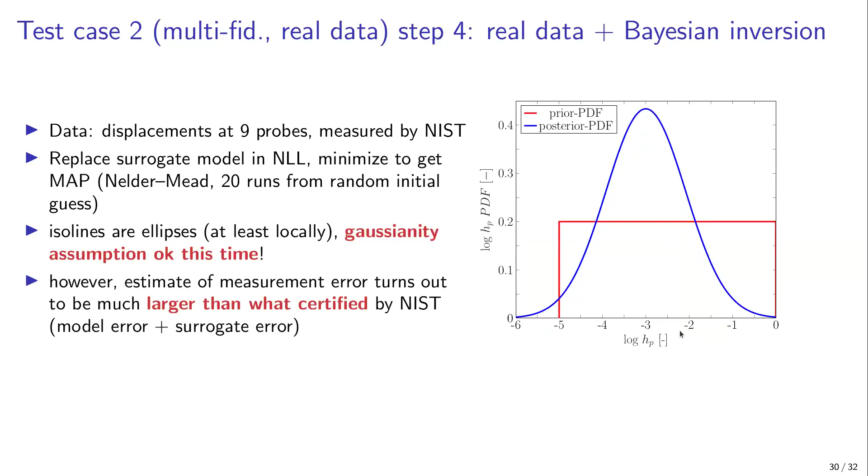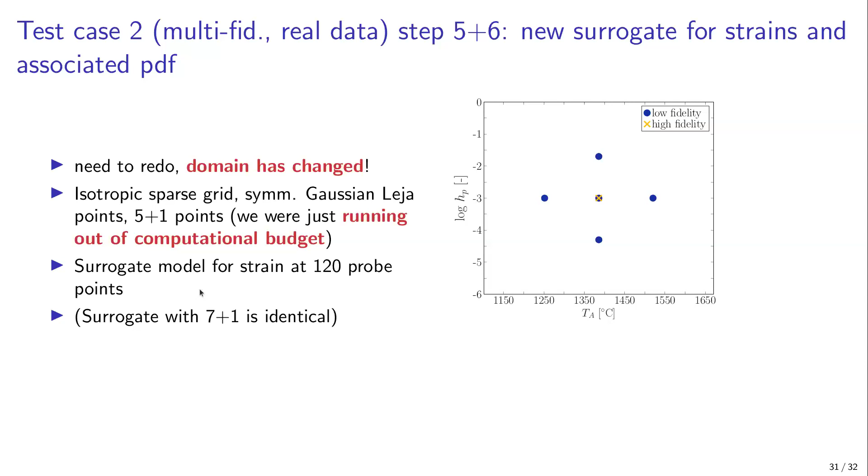We actually then found some extra budget to run two more high fidelity points with the same surrogate. So we were happy enough. Clearly, this time the concentration is smaller because these are real data.

One thing I should have mentioned earlier is that once you compute the map, you can compute a sample estimate of the error at the map. So you sum the misfits between your surrogate model and the actual values at the map.

That quantity gives you an estimate of the experimental error. That estimate is completely off. So our surrogate model is not nearly accurate enough, and the physics is not nearly accurate enough to have the same confidence as the experiments.

So of course, now we still have some uncertainty in the posterior. But what is very nice, as I was mentioning at the beginning, is that the posterior is again unimodal, and the mode of the posterior-based prediction of the quantity of interest fairly well matches the experimental data. So the colleagues in the engineering department were super happy about this result.

So I'm at the end of my talk. I want to just draw some conclusions.

Multi-fidelity MISC is a multi-fidelity method. It extends sparse grids. It just adds an extra flag, if you want, to each collocation point of a sparse grid, and this flag tells you what mesh you are supposed to run your model on.

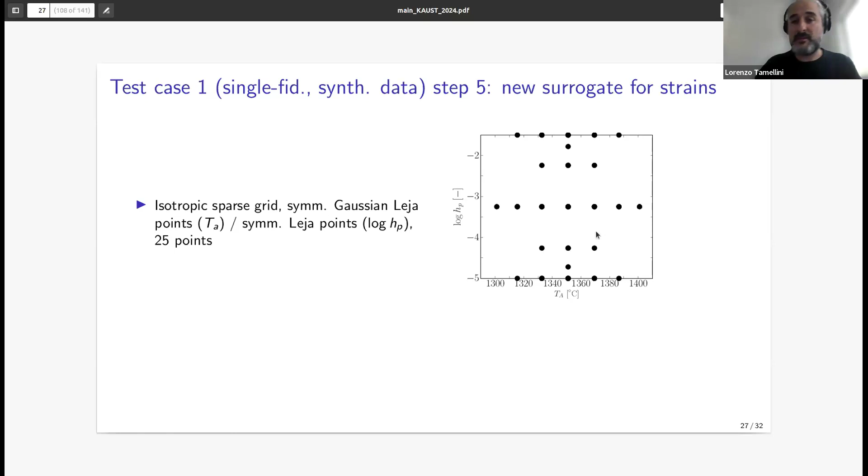But in principle, you could just forget about the fact that TA is Gaussian. You could assume that TA is uniform just on a smaller support, and then build a surrogate model assuming that the posterior is also the prior, and then just use the information on the Gaussianity when you actually sample the surrogate. If you do that, then even the posterior surrogate model will use the edges of the support, and the edges might be in common.

That's the long story. Third thing, you could—this is research I'm currently working on—try to do a single surrogate that is adaptive. The adaptive criterion is: you have a coarse surrogate, you do a first attempt at the inversion, see how the posterior looks like, correct the model, correct the surrogate based on the information on the posterior, and go iteratively like that. So that's an even more complicated approach.

So the short answer to your question is yes, we can reuse at least some of the samples if you do things carefully. We didn't go that far in these works. Did I answer your question? Yes. Okay.

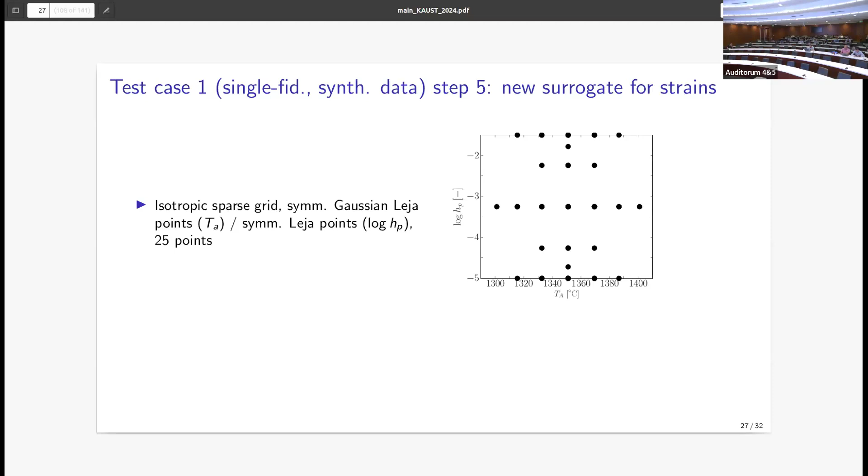Any other question from the audience? So Lorenzo, I can add a question here. So if you go to the multi-fidelity part—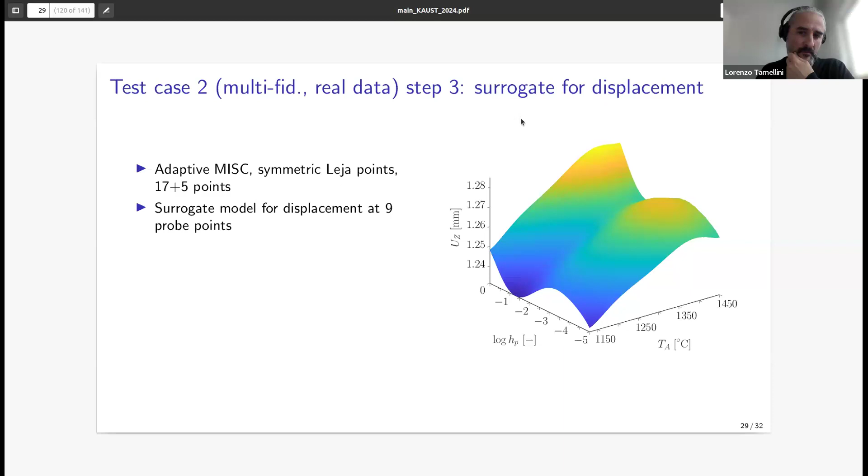Yes, here. So how many did you use? I mean, from the figure you kind of said it, but how many did you use on the higher fidelity versus the low fidelity? And did you consider that they could go higher than two levels?

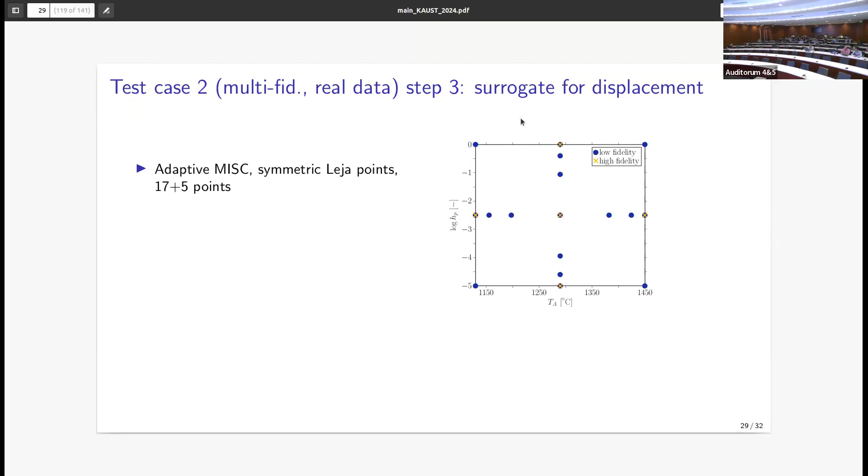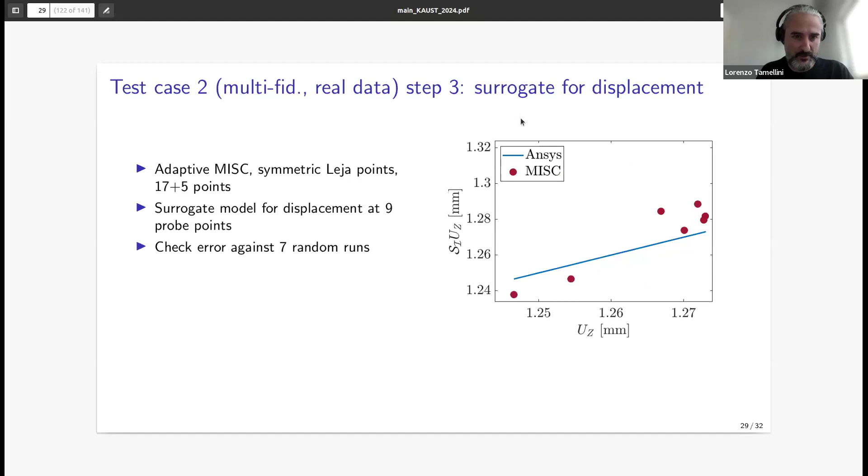So yes, 17 points on the low fidelity, plus 5 in the first surrogate. And then for the second surrogate, it's 5 more, so 22 in total on the low and 6 on the high fidelity. None of this is in common. If I had gone down the way I just talked to with Fabio, then some of these could be in common, but so far they are not.

Can we use a third mesh? Not a larger one—the larger one is out of discussion. It just takes forever. I mean, I will still be running simulations if I were to wait a month for one simulation.

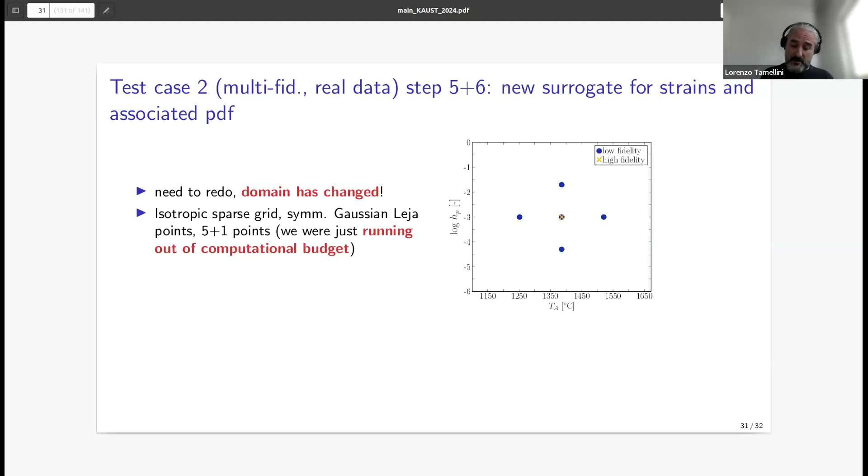A third mesh that is even coarser than this one—so where is it? Here. Finer than the high fidelity, impossible. Lower than the low fidelity, we tried. They were completely unreliable. And there are geometrical constraints.

As I said, the printing process is simulated by packing together multiple layers. So the physical thing is, I don't know, 4 millimeters. Each layer in practice is like 10 micrometers or whatever. So it has a certain number of layers, and then you group them, but your meshes have to respect the physical layers. So you cannot choose whatever mesh you want.

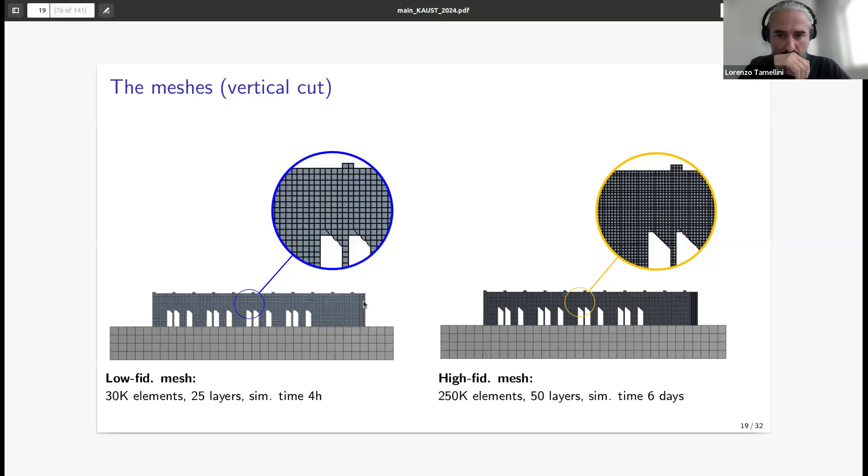Okay, just a comment as well—on the high fidelity one, in that case study, it almost looks like the result you have would have been almost equivalent to if you didn't do any a posteriori adaptivity. Right? Because I would have started off at some point that is roughly what the results are.

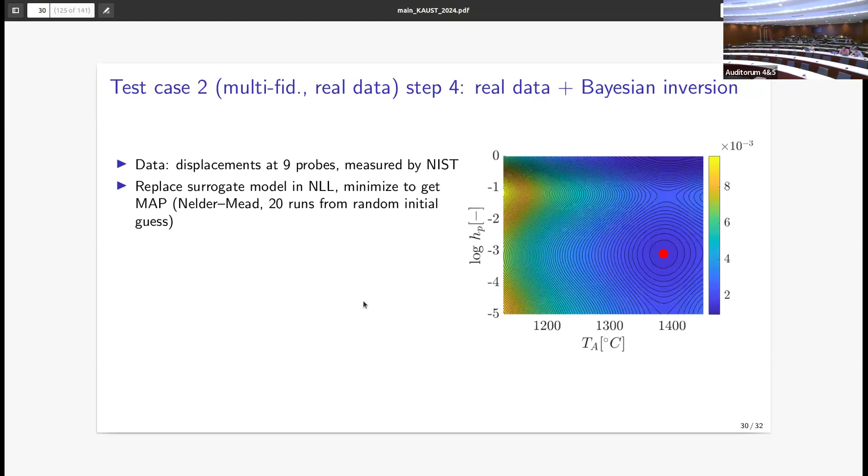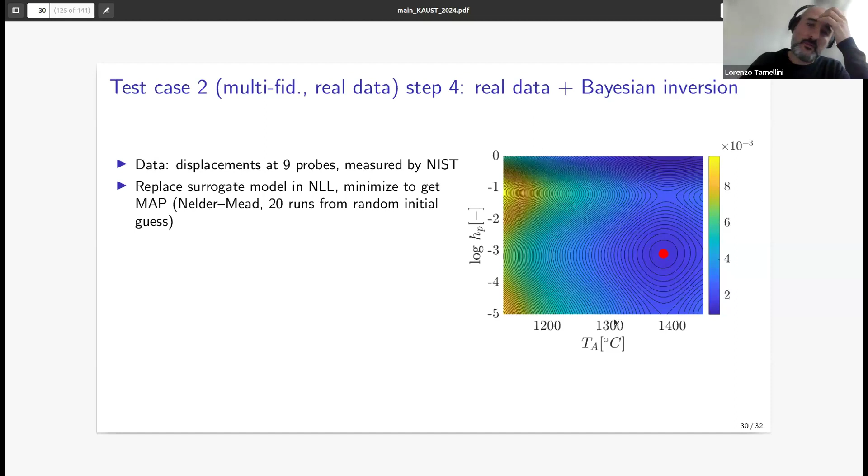Well, I mean, perhaps, but my point is—let's say no. The uncertainty on the log HP, I don't know, I was told this was a reasonable range, and then the TA comes from the literature. So yes, the results are not too different, but we do get some.

I agree, and I can maybe add one small thing. When you're doing the adaptivity, especially if you could run this longer, say for case 1, how do you deal with having more than a scalar quantity of interest? Because here you have 9 displacements. I don't remember exactly, Michaela was doing the runs, but I believe we were either adapting to only one probe, so the profit is computed only on one probe, not on all 9, or we take the average of the 9 probes. So you select the multi-index that gives the largest improvement in the average of the probes. It would be something like the worst case or some kind of average, but if you want to build this with a very expensive model, you'd need to consider building surrogates adapted together if the quantities are correlated, rather than single surrogates for each.

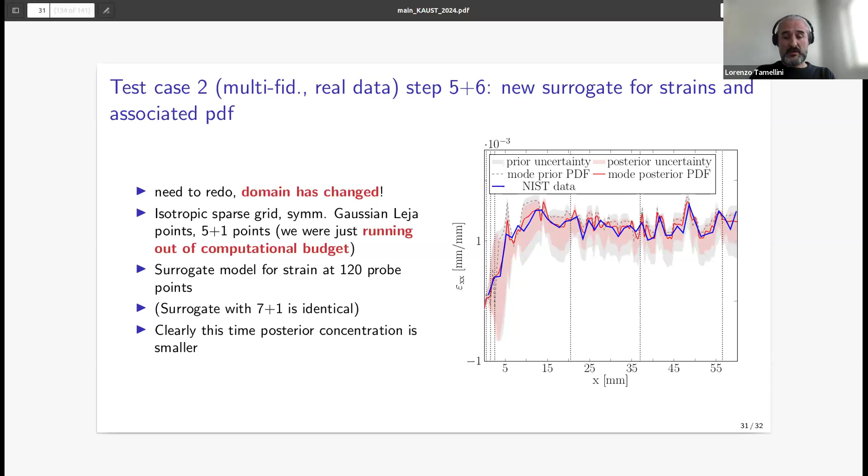Thank you so much, that's what I have. Is there any questions on Zoom? Fabio? Okay, so Fabio has a question.

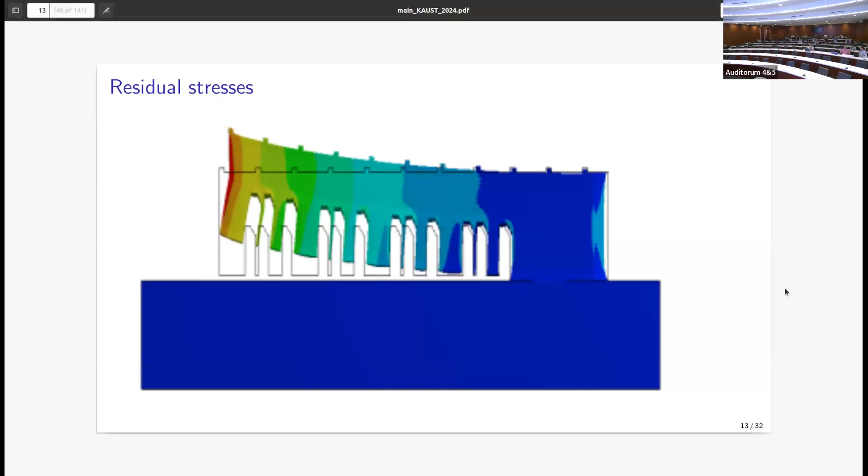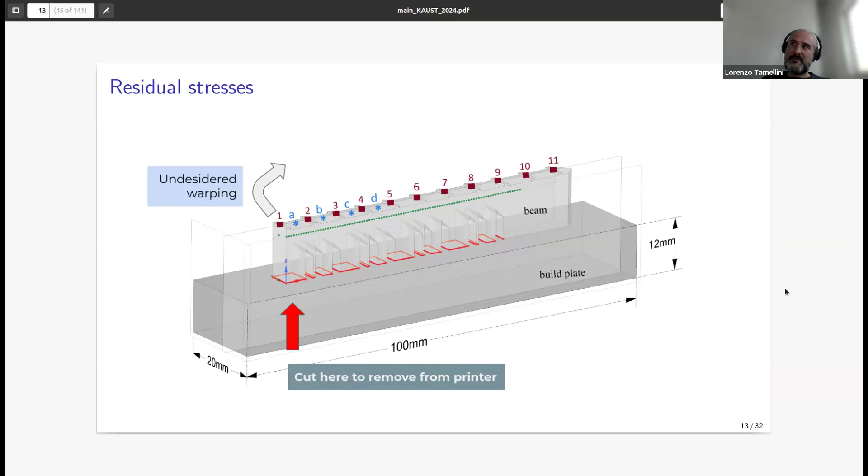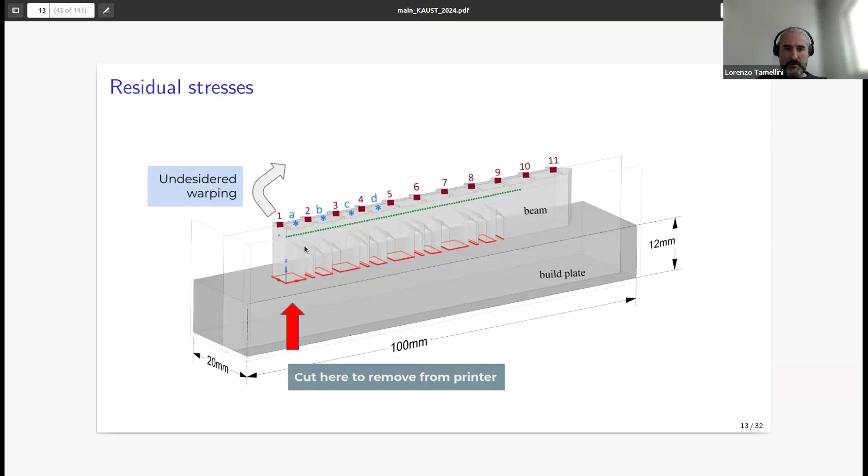What is this comb shape? Oh, the shape is super weird, I totally agree. It's something that has been designed specifically to make the life of the printer as difficult as possible. The teeth of the comb have different thicknesses. The larger the thickness, the easier the diffusion of heat, so it's better when you print it. Then there are angles here, and printing something with this kind of angle requires support structures, so that's also tough for the printer. These little details on top are also hard to get. So it's not a practical object, it's a good test case for the printer. I could tell you the name of the printer, but I don't remember. What I remember is the metal is an alloy of titanium and something. So it's not an object with practical purposes other than giving a hard time to the printer.

So it's not a comb? It's not technically a comb, no. It's like 10 centimeters or so.

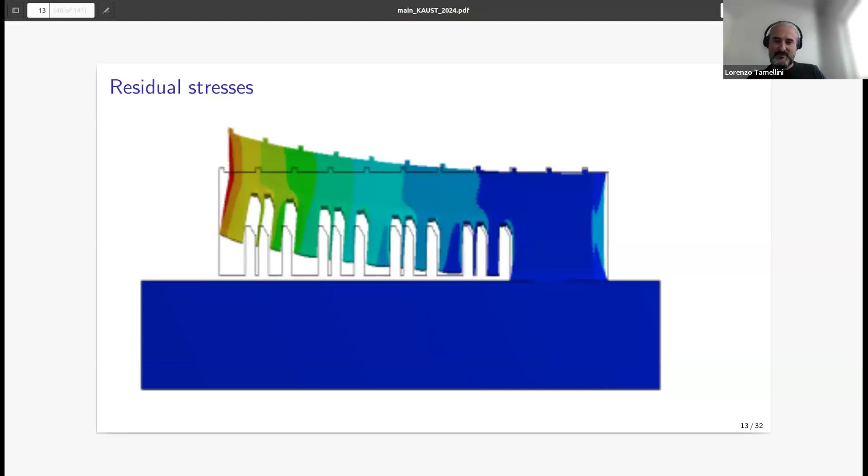Okay, so thank you so much, Lorenzo, for a nice talk. Thanks everyone, thank you. See you soon, bye. Bye.